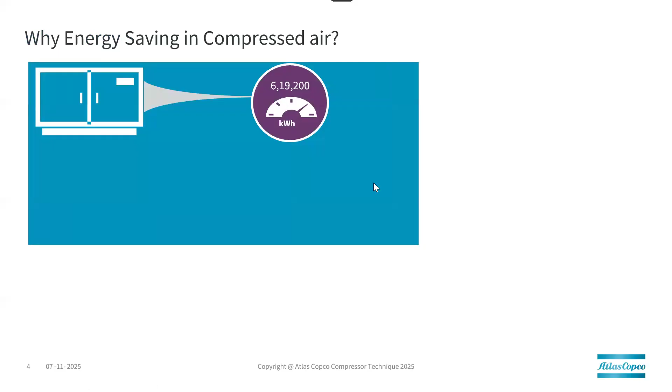This is all about Atlas Copco. Last year we almost completed 150 years in sustainable growth. To move ahead, why is energy saving important in compressed air? This is a simple brief explanation of why we need to save energy in compressed air.

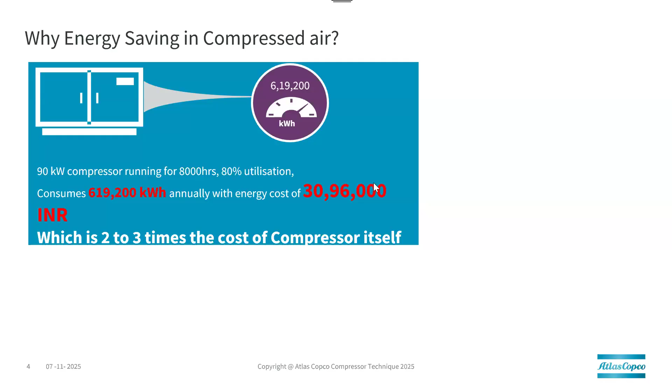If I would take a 90 kilowatt compressor running around 8,000 hours per year, with roughly 80% utilization, it would consume approximately 6,19,200 kWh annually. Considering a minimum of 5 rupees INR per unit, it would cost around 30 lakhs 96,000 approximately to run this 90 kilowatt compressor in your industry, which is approximately 2 to 3 times higher than the compressor cost itself. This is the compressor life cycle.

So it has been categorized into 3 types: maintenance, investment, and energy cost. Investment is the one-time investment, for example roughly 10 lakhs or 15 lakhs. Maintenance plays a pivotal role for compressors and consumes about 10% of the cost. Energy is the key for all compressors because we need current energy to run them, and it is actually 70% among the total 100%. So 70% of total cost of ownership is going to be in electrical consumption. That's why saving energy in compressor systems plays a pivotal role.

In upcoming slides, we'll show what opportunities are available to save that energy. In addition, air is free but compressed air is not, because we get air from the atmosphere, but once it has been compressed at the compressor outlet, it won't be free of cost. We are using energy to compress that air, so energy saving is mandatory in compressed air systems.

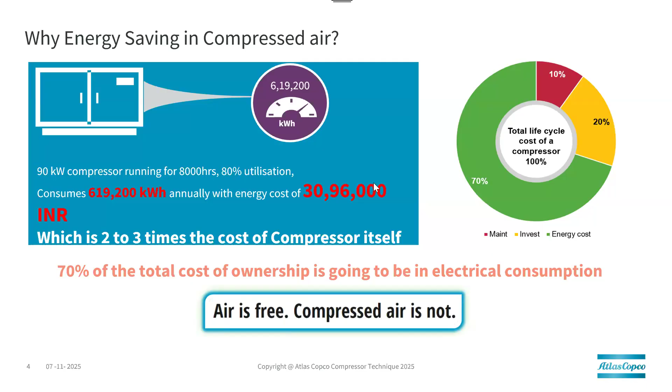What would be the operating cost, and why we have to pay serious attention to energy for compressors? Here's another rough example. In the supply side, if you take a 100 kilowatt compressor generating 600 CFM at 7 bar pressure, this compressor has air losses, demands, air leaks, and artificial demand.

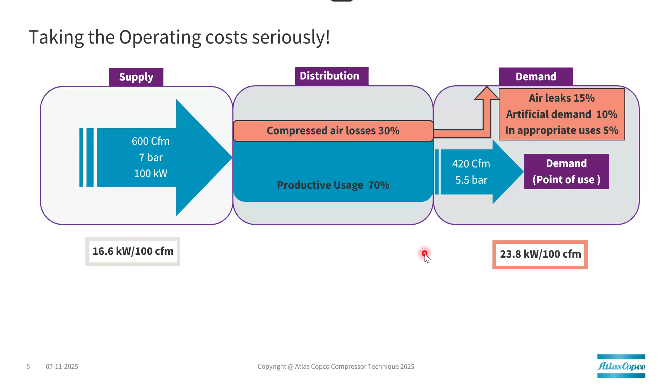Next, these are the portfolios we are offering to all customers in the supply side, distribution, and demand side - what activities can reduce energy in the compressor system. On the supply side, we offer compressor operating efficiency, dryer operating efficiency, compressed air quality, installation checks - yes, ultimately installation also plays a major role - primary receiver analysis, and compressor operation pattern. We have the activity-wise description in the upcoming slide, giving an overview of the portfolio we offer on the supply, distribution, and demand side.

On the distribution side, we offer pressure drop analysis, distribution pipe diameter calculation, because at many sites we are unable to provide the correct pipe sizes, and because of that we face loss of energy. And also leak detection.

So this will be the key role in the compressor part, and secondary receiver analysis. Yes, wherever we are facing a pressure drop issue at the demand side, this will play a key role. In addition to that, demand analysis, how much we are consuming, what would be the requirement, at least need to understand the pattern.

Followed by specific energy consumption in the distribution side, followed by demand side leak detection. Ultimately distribution and demand, both leak detection is mandatory, and application flow requirement for each division. And artificial demand, how to identify the artificial demand, end use optimization, POUs, compressed air quality, and emergency receiver analysis wherever the pressure drop is mandatory for certain applications.

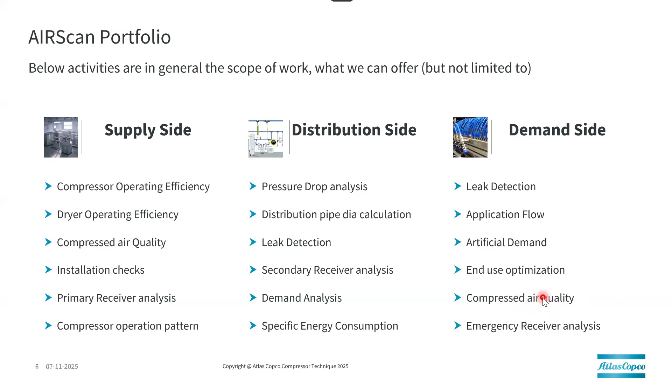So these are the brief overview of generation side. Here we have discussed about the compressor operating efficiency, dryer, compressed air quality. So these are the explanations. What are the opportunities available in front of us, in three categories: one would be generation side, another would be distribution side, and another would be demand side. If I consider generation side, these are the opportunities in front of us.

So it is nothing but upgrade. Everyone's familiar with screw compressors. Yes, we are familiar, but once the compressor starts deteriorating, the whole compressor will be utilized differently. The moment new compressors are brought into the field, their SPC won't be the same when it goes to 5 to 10 years. It won't be similar. Ultimately, deterioration will happen, so this is one opportunity that will exist.

So upgrade your old compressor with more advanced technology like VSD compressors. There we have opportunity to retrieve the SPC back to its original position. That can be possible up to 50%.

And another one is waste heat recovery. This will be the key part. Recover the waste heat from the compressor coolers for useful heating in your process, where we can save up to 90% of motor power input recovered from this process.

Followed by central controllers. If you have multiple installations, like 3 to 4 installations, and we don't know about the operation pattern, these central controllers will help us align our generation, and we could save energy by installing these central controllers. Central controllers won't only control 3 to 4 as the initial part, but can control up to 30 machines. This will be a huge number where we don't want to put much attention to the generation side, where this one master controller will take the initiative and control all the generation compressors.

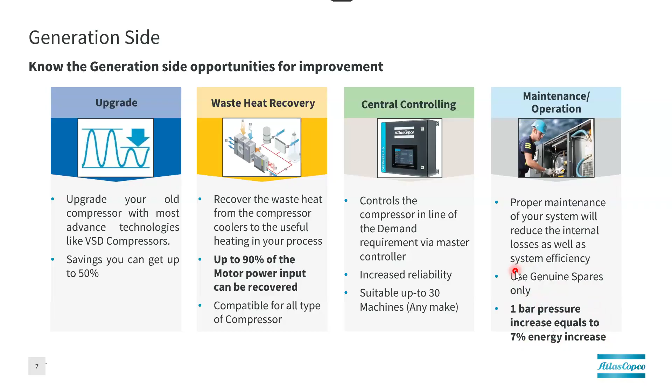And when it comes to distribution side, pipeline material, wherever air quality will be key, it's highly recommended to go for non-corrosive materials, because the pipes start deteriorating. At the compressor outlet, we used to get saturated air where it will be full of water. If you select the wrong material, it will start rusting and deteriorating.

The moment the pipe starts rusting, it will give a pressure drop. Ultimately it will end up increasing the compressor set point, which will again impact and increase energy consumption. And receiver sizing will be key. If your receiver is undersized, ultimately again pressure drop issues will be created.

Every 1 bar reduction in the operating pressure can reduce the energy bill, so this plays a key role. We need to identify unwanted bends to reduce the pressure drop. Just ask ourselves, if the demand side requires 6 bar, it won't make sense to keep the set point at 7 or 8 bar pressure. The compressor will be utilized - if it can generate 8 to 9 bar pressure, it will run. But rather, how much is the requirement, that's what matters. So we try to achieve reductions to achieve 7%.

In addition to that, 13% of compressed air is wasted due to leakages. So this will be key - wherever the 13% of leak can be arrested, it will give 1 bar pressure. And pipeline layout as well - there will be conflicts about whether compressor-dryer-receiver or compressor-receiver-dryer. These installations will also give some energy saving.

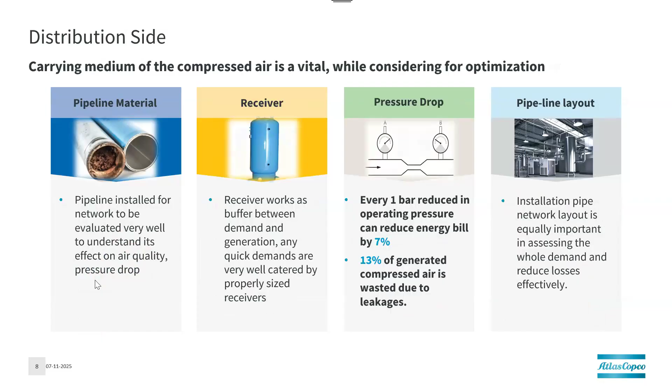And compressed air quality, at the last. This will be less priority, but will give high results, because whenever you are not paying attention to compressed air quality, as seen in the previous slide, the pipe material got deteriorated, ultimately ending up in a pressure drop. These are invisible things which impact energy saving, so compressed air quality needs high priority and attention. Water can damage pipes and pneumatics, and dust can also damage pneumatic pistons. Ultimately, all these things will impact energy savings.

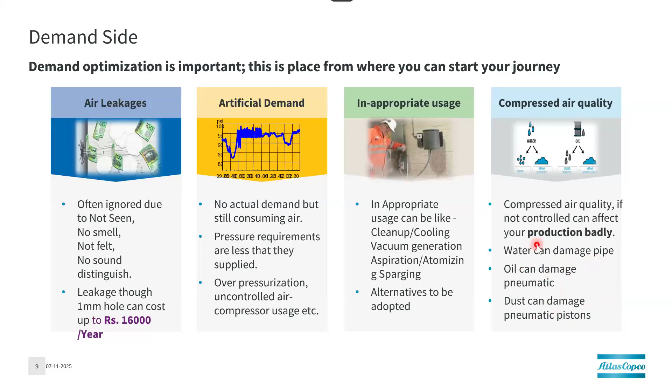So these are the success stories in large scale industries. We also conduct audits in small scale industries where customers are benefited - these are the installations. This will be one of our sites - a medium installation of 675 kilowatt compressors running, a 7-year-old plant. We conducted the audit execution for 2 days, including leak repair, pressure setting optimization, and demand optimization.

From this audit, the customer saved around 15 lakhs - 1,52,340 kWh per year.

If you consider the return on investment, ROI will be less than 15 days—actually less than a month when it comes to the energy part in compressors. Always, in all cases, ROI will be less than a month. As shown in the first slide, we witnessed that 70% of the energy is in compressed air. If you consider that investment in compressed air audit, it won't impact much, and ROI will be less than a month in all cases, maybe not more than 6 months.

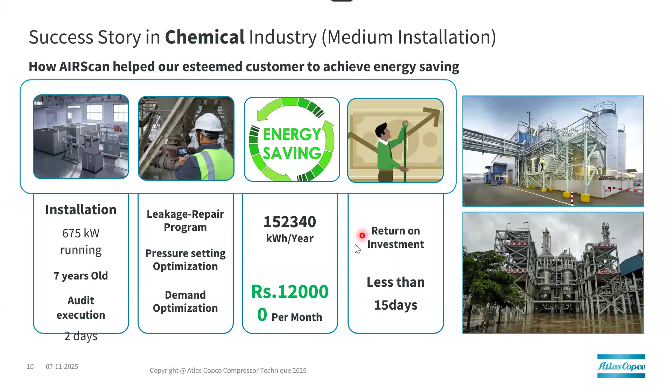These are small installations at one of our sites, small scale industries with 345 kilowatt compressors. We conducted the audit for 25 to 30 days, and for every activity we offered, the customer implemented it. As a result, the customer saved 8,56,000 kWh per year, and the investment payback was less than 2 months.

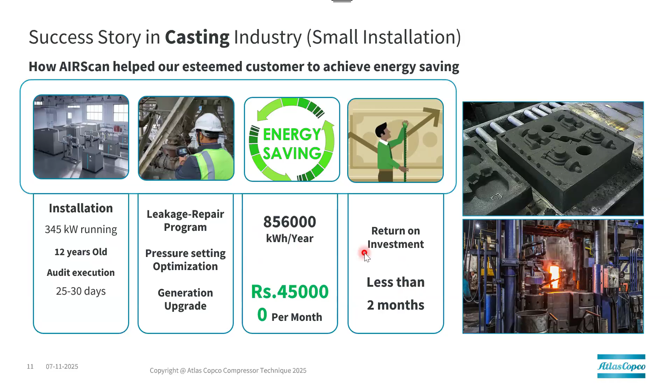So this is all about air audit energy saving opportunities on both the supply side and the demand and distribution side. Next, we move into energy saving solutions and technologies—what we are offering. I'll hand this over to Avinash.

Thank you, Vijay. Good morning everyone, and almost good afternoon. Thank you for this opportunity. I'm Avinash, as already introduced to you earlier.

In the energy saving solutions we'll explain to you, there are energy recovery solutions—mainly how we use the heat of compression or the heat of compressed air generated by the compressed air technology. There are smart air central controllers, where if you have many compressors and your pressure band is hard to manage, a smart central controller can help save energy. There's also compressed air piping—how a closed loop or ring-type system can help. And finally, why Atlas Copco is the best in the industry.

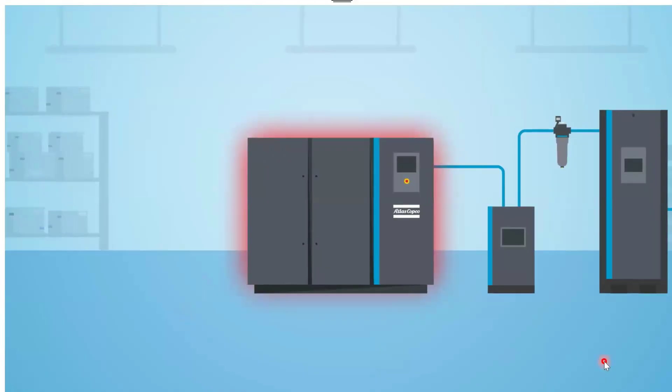Do you know how much waste heat is produced by your compressor? How much energy is blown into the environment? As energy prices and demand grow globally, it becomes more valuable. Up to 94% of the electricity input to a compressor is converted to waste heat. Instead of wasting it, we can convert it into a sustainable solution—that's where energy recovery comes in. Energy recovery uses the waste heat of your compressor for other useful operations, converting heat into heat again, using it to cool, or even to create more electricity. It's a versatile solution generating large savings. Our energy recovery solutions have already helped save 1.3 billion kilowatt hours, 809,000 tons of CO2, and 1.36 million trees. Atlas Copco's energy recovery solutions bring you one step closer to a low-carbon utility room, with increased efficiency, more savings, and a greener future for all of us.

Thank you. I think you can understand the basic of what energy recovery is. So moving on, next slide please.

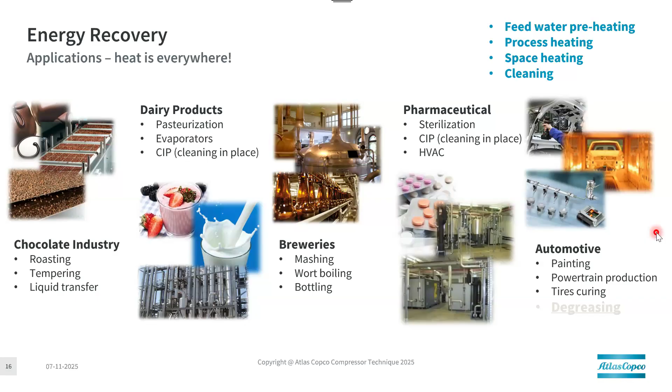Next slide please. These are certain case studies where we have installed our energy recovery solutions, and that gave huge savings to the customers, with ROI less than 2 years, or 1 year to be precise.

The first one is auto ancillary systems where the requirement of hot water is 60 to 70 degrees Celsius, used particularly for degreasing, where the heat source was previously electrical heaters, and the electricity used yearly was more than what they can generate from the compressors. So we provided energy recovery systems to their compressor system, and through that they got something like 60 to 90 degrees Celsius of temperature. With that water, they can use it for pre-treatment, washing, component cleaning, degreasing, and all the auto ancillary requirements which required low saturation water.

We also have spinning mills in the textile industry, with yarn conditioning plants (YCPs), which mainly require hot water above 60 degrees Celsius, but not needing to go above 150 degrees, which is high saturated steam. They require something like 50 to 130 degrees Celsius roughly. In that area too, because of old fashioned systems, they used electrical heaters, and we used their compressors, with the heat of compression generated from their compressors being utilized for energy recovery, giving huge savings as shown in the picture.

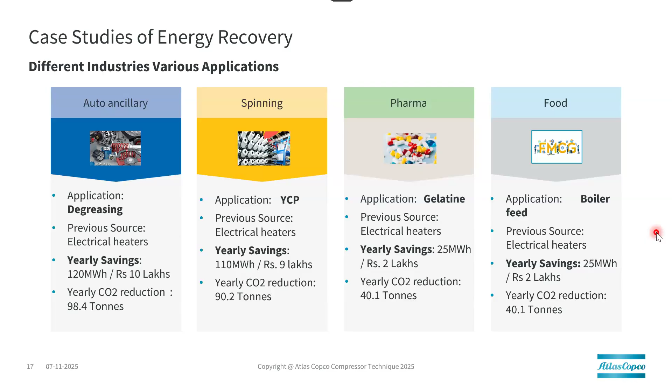The same applies for the food industries. These are the major requirements of how we utilize energy recovery systems, how we utilize the heat of compression, which is generated almost like 120 to 130 degrees Celsius, up to a maximum of 75% for oil injected compressors. We can convert that and utilize it for our requirements.

Moving on, we have central controller systems which we want to explain, with a brief small video that shows how our Concerto can do wonders with the complete music band.

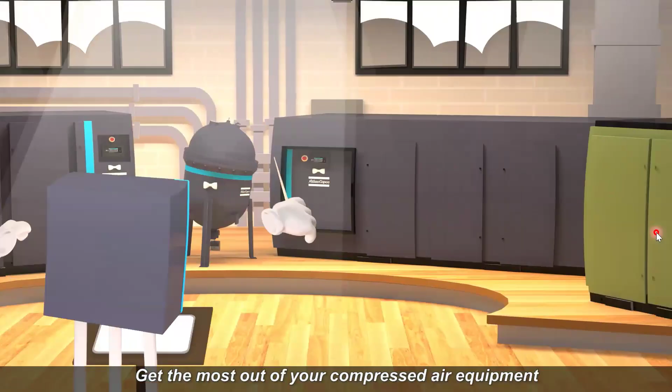Vijay, I think there was no audio was not there.

Sorry for the video not having an audio system, but what it is doing is, as a controller, it is trying to control all the machines. You can see on the control display there are three main things which are mainly being controlled by a central controller: power, running hours, and uptime.

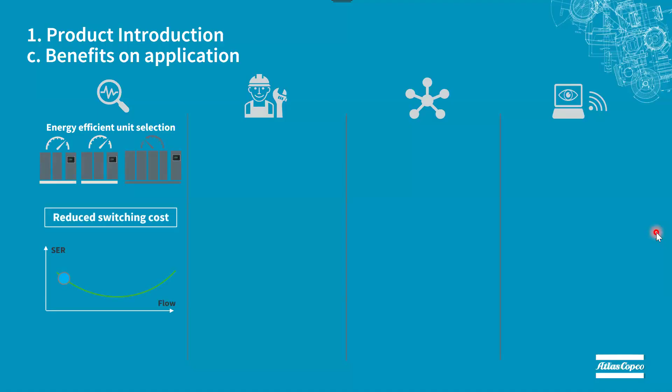For any compressor system or utility system, what an engineer or utility manager requires is to run a utility in a maximum optimal way, where as little power as possible is required for a maximum level of uptime, with running hours being even for all the compressors or all the utility systems.

Our central controller does the same thing. If you are not controlling it through any external systems, through a local operator or your internal team, there might be chances that the functioning might not synchronize with each other, because the compressors can't communicate with each other.

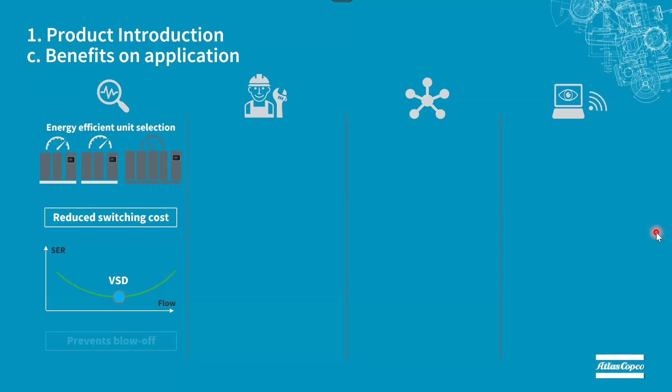Why is it important to maintain the same running hours? Because it maintains greater uptime. If you are running one compressor more than others, it can generate wear and tear for only that one compressor, causing a higher chance of breakdown for that particular compressor. That risk should be cancelled by evenly distributing the utilization of all the compressors.

Not only that, we can even stabilize the pressure, as Mr. Vijay already explained what a pressure band can do. Even a small increase of pressure, say 1 bar, can generate a 13% increase in your power requirement. So if we control it with a control system and synchronize it with our system...

What it does is, if your required pressure for example is 7.5 bar, it may delegate or maintain 6.5 or 7 bar pressure with the same flow being generated from the compressors. That's how our controllers function at an even, stable stage.

There's also a possible decrease in load-unload cycles if you have fixed speed compressors, where continuous requirement of compressors can also be decreased, and even your unload energy, which is wasted power, can also be decreased to a certain level.

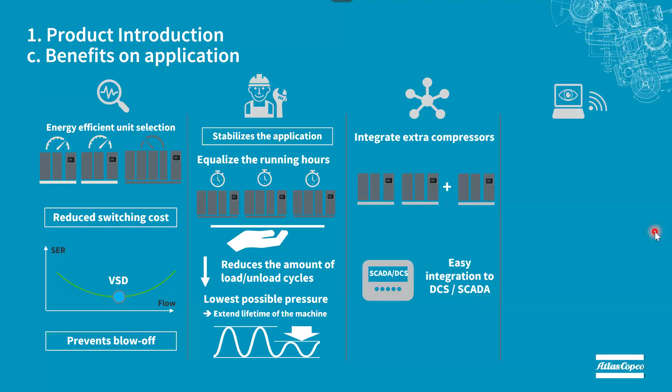Moving on, there are certain things which can help you monitor. Not only by controlling, you can also monitor with your distributed control systems, and that also through your SCADA systems. You can also integrate external compressors or competitor compressors, not only Atlas Copco.

There are certain technologies we are using, like remote view, where you can see from wherever you are in the world what the functioning of your utility is.

And smart view is how you analyze your data over 30 days - what analysis you want to do, how much runtime you are having, any downtime, any abnormalities or maintenance issues you can understand - that can be seen through the smart view systems.

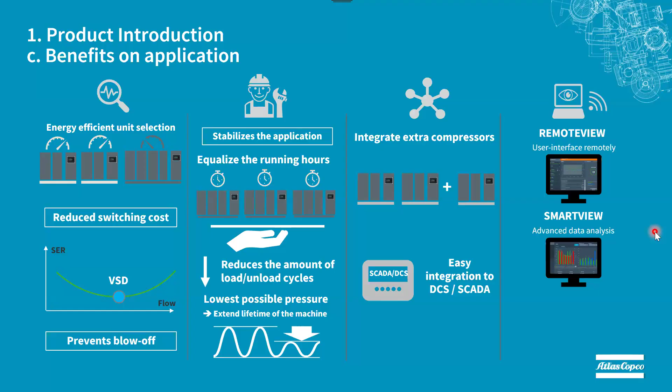And moving on, you have SmartLink also, which helps you understand wherever in the world you are, how the compressors are being run. I already mentioned how a competitor's machine can be interlinked to a controller.

We can have some CIM units, which are competitor interface modules, that can be fixed to the competitor machines and interlinked to our central controllers, so they can be controlled based on the pressure band and their control type as well.

So this is what our central controllers will provide. We have been installing this in major aluminum plants or major steel plants, and even in automobile industries, which are getting huge savings of almost 100 kilowatt hour per week of their running. That is humongous altogether, because unnecessarily that is going to waste due to the operations of the compressors.

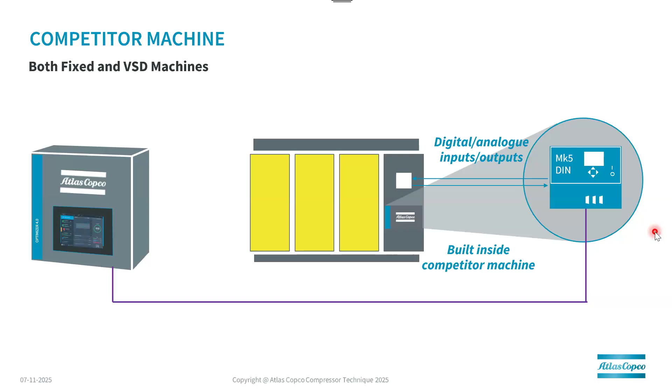We have AIRnet systems being installed in all the plants, in aluminum and stainless steel industries as well. These AIRnet systems provide a better and efficient way for air to flow.

Because if you use MS, the main problem with mild steel is it forms rust internally, and that creates friction. You might consider that friction can create a very low pressure drop. But if you are considering a whole plant, and the end point from the compressor room to the end point is something like 500 or 1000 meters, this pressure drop can generate a huge wastage for you.

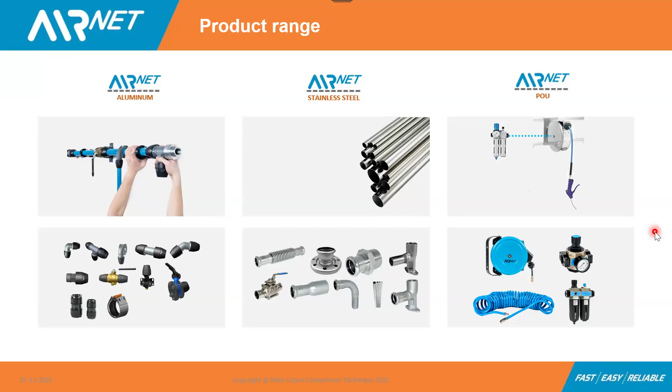As I already mentioned, these are all conventional piping system issues which we might not know till we understand why we are failing. That's why we have to move on to aluminum or stainless steel piping. The main reasons are that rust formation is not possible for stainless steel or aluminum piping, and internal contamination is not a case in AirNet systems, because there will be no internal oxidation or any formation in the pipe, and internal fittings accumulation will also not be possible.

Whereas in MS pipings we have seen a lot of plants where pressure is gradually reduced to more than 1.5 bar, which is a huge number altogether, because your compressor is running at something like 7 bar, and at the end point you are getting 4 bar, which is ridiculous. You are losing a lot of air.

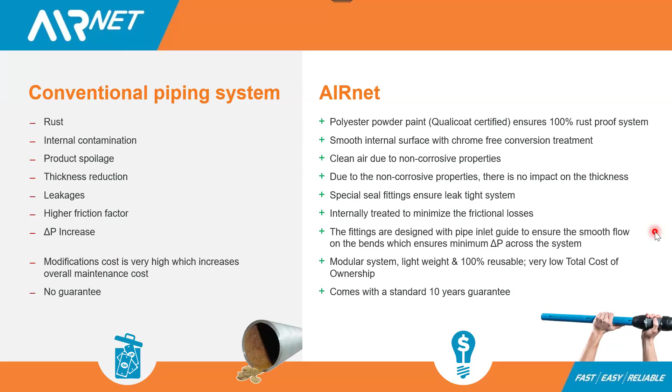I hope you can understand the importance of a piping system, and why we continuously explain that we have to maintain a closed loop system or a ring type header system. If you keep an open end for an application, that can provide airflow for your requirement, but at the extreme endpoint of your airline, that might not help you maintain that particular pressure, because the flow itself is decreasing towards the end point.

So gradually, as flow decreases, the pressure might also decrease. Whereas in a ring type system, the same header line is maintained throughout the system in a ring formation, which can reduce your pressure drop issues. Why is pressure drop decreased? Because you are utilizing the air uniformly. The air is distributed uniformly.

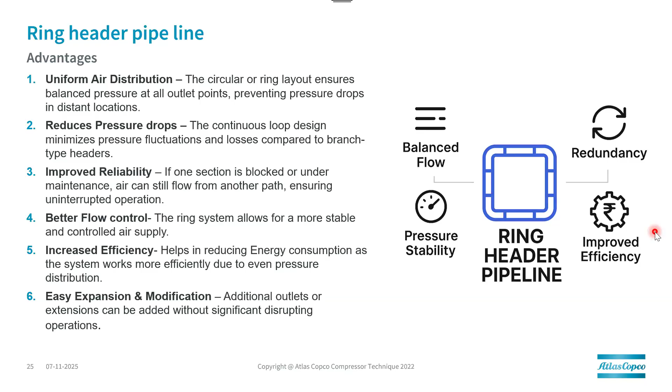Wherever the air is coming, you are just flowing it towards a ring formation, so that air pressure is maintained evenly all over the plant. You can understand the reliability concept here, because you won't feel higher pressure at the start of the compressor room and lower pressure at the end. A lot of requirements can be fulfilled by using the ring type system. I think this is self-explanatory of why we are using it.

For a transvector nozzle or volume amplifier, this is a case study which we have observed in a few pharma companies, and also in a steel plant which we recently audited. Initially we need to understand what a transvector nozzle is or what a volume amplifier is.

Generally it is a unit or equipment where we provide pressurized air to produce more flow with lesser pressure. How is that possible? You see a Coanda effect, which we have already explained here. A jet of fluid, in this case air, is subjected at a pressure of 6 bar, for example, flowing in one direction. Due to this Coanda effect, what it explains is that a jet of fluid will try to divert itself towards the curves of the path wherever provided.

If we provide any curve, the jet will try to flow towards that curve, which creates a lower pressure at the curved surface. That lower pressure will try to attract the ambient air, because there will be a small hole provided to suck the ambient air towards the compressed air line. Altogether, after the curved surface, this jet of fluid along with the ambient air is flown towards the outlet.

PPR piping, yes sir, we will get back to you for that.

This is what I am trying to explain. We even have a case study where volume amplifiers showed a lot of savings. This was a case where for a motor, towards non-driven and driven, they kept cooling points, and almost the loss was 30 CFM at 6 bar pressure. When we install a volume amplifier, it almost cuts the flow in half, and the pressure is also decreased to 1 to 2 bar. In that way we did the calculations, basic mathematics. So that's how we are doing things.

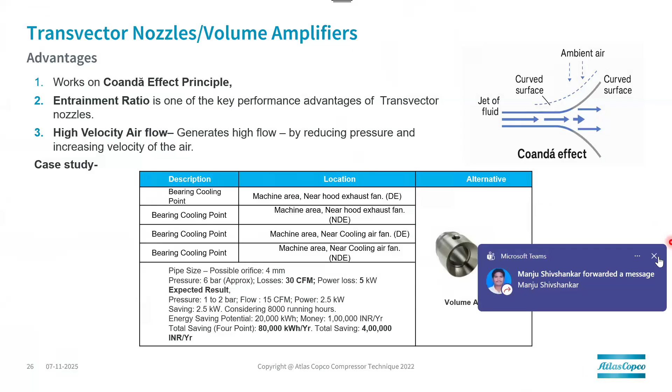So moving on, we would like to forward it to our Sudhakar sir, who can guide you towards it. And sir, for PPR piping, we will get back to you in the discussions in the chat question.

Yes, thank you Avinash. Thank you Vijay and Avinash for the wonderful presentation on energy savings aspect on Atlas Copco. I would like to take this presentation forward with our industrial solution. My name is Sudhakar, I'm handling Tamil Nadu area as a territory manager for equipment sales. So we'll go through the total solution we are offering in Atlas Copco. Avinash and Vijay mostly covered all the equipment like central controllers and energy recovery, so I can give the glimpse of how it will look in a compressor air circuit.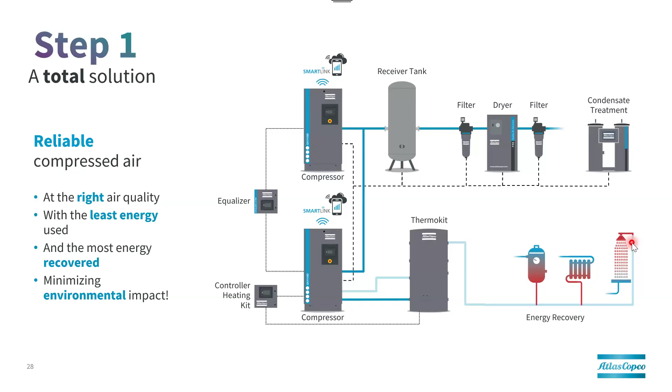And you can see energy recovery, this is very well covered by our colleagues. You can utilize the compressed air energy in your application, maybe if you require steam or whatever application where you need heat, you can separate it and use it, so we reuse the energy, meaning it provides energy savings. This is the total solution Atlas Copco is offering today. In our advanced compressors, we keep inventing a lot of things, and this is our latest innovations.

If you look at our high efficiency drivetrain, this is patented. Atlas Copco is offering direct drive in our VFD compressors. This direct drive will save a huge amount of energy, because there will not be any transmission loss in the compressor.

We are also offering an advanced filter system. I'm not able to bring all the filter systems here in the presentation, considering the limitation of time. We are offering filters up to 0.009 milligram per meter cube efficiency of filtration. So if you have any target of filtration with high efficiency, we will support.

We also have advanced controllers. Today in the compressor industry, we have all advanced controllers that make the compressor act very smartly wherever energy saving is possible. It will help the customer to save, and this is one of the advanced systems of Atlas Copco.

And we have a smart zero loss drain. So we are saving energy with our zero loss drain also, and this central controller has already been clearly explained.

And we have an inPASS filter. In industries, you can see a bypass valve arrangement near the filter. Whenever the filter changes, some service is required, and the air is bypassed with that bypass system. We brought this product called bypass inPASS filter, so if you install this filter, there's no need to go for a separate bypass arrangement system. You can change the cartridge and do service, and in parallel the bypass arrangement is available within the filter. The air can be routed through this bypass system without interrupting the supply of air.

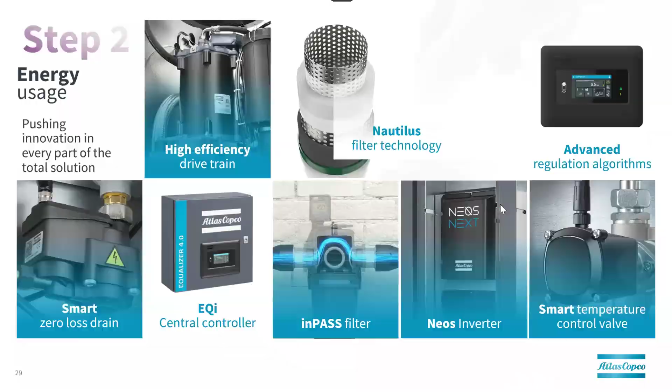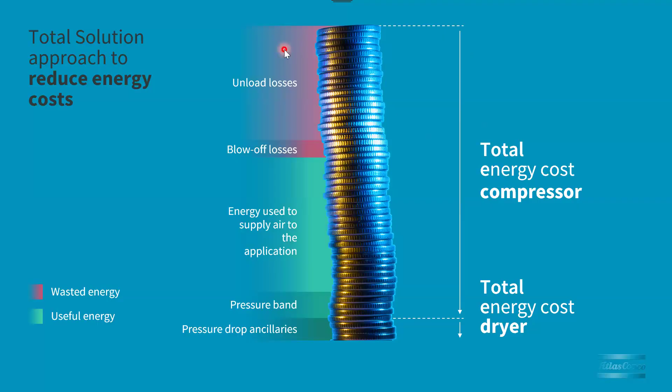If you look at these coins, this represents the total energy cost of the compressor where the industry is spending. This involves creating compressed air, for which energy is required, and we create pressure up to whatever the application demands. We are also paying cost for pressure drop, because ancillaries like filter and dryer also cause a pressure drop, and there will be blow off losses. If you look at today's fixed drive compressor, you might be aware of this term called blow off losses. This is the biggest headache for most industries - it's called unload losses, which is idle running loss. How we are addressing this and saving energy for the customer, we can see in the next slides.

Our VFD compressor, thanks to Atlas Copco's patented design, with our recent VSD Plus technology, ensures zero idle running, meaning we completely eliminate idle running. That is the unique feature of Atlas Copco. Compared to any competition, Atlas Copco's compressor will only switch on and off. If the load is reduced in the system, it automatically switches off. There is no limitation in the number of on-off cycles with this oil cooled permanent magnet and VFD setup, so the compressor will not go to idle running at all. This is the best thing about these VSD Plus compressors.

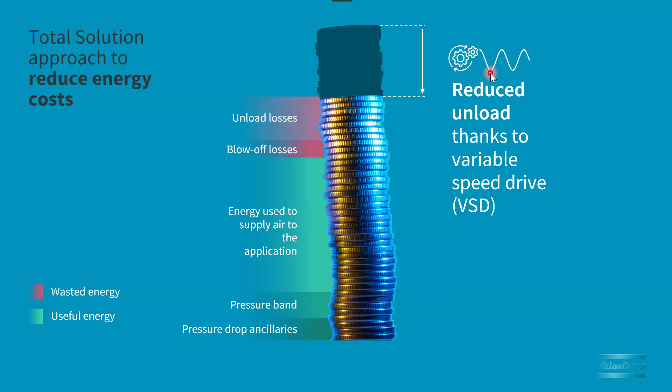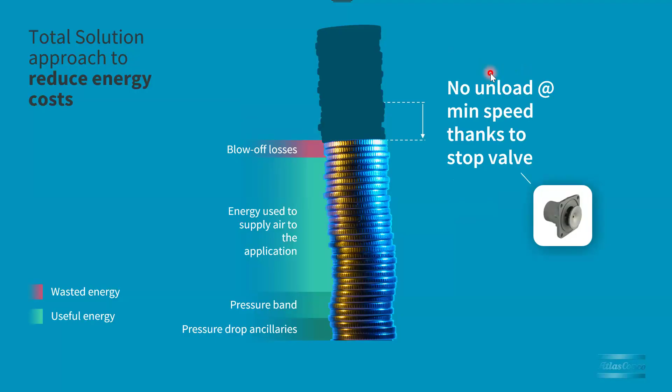By this, we are completely eliminating unload losses, and with no unload, blow off also will not be available in the system. Thanks to our stop valve, which allows air, once the load is less it immediately switches off and will not allow any air inside. So we ensure only on-off in the system, completely removing blow off loss also.

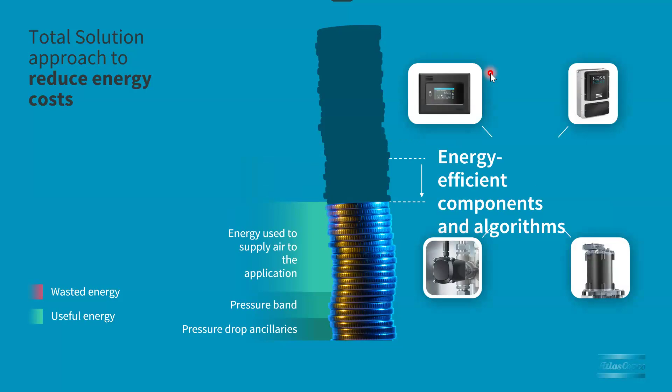As I explained, our central controllers and other systems save power. With this combination of systems, we save further energy according to the application, adjusting to the application. The equalizer narrows the pressure band and will not allow the compressor to cascade through different pressure settings. It gives a lot of energy savings to customers.

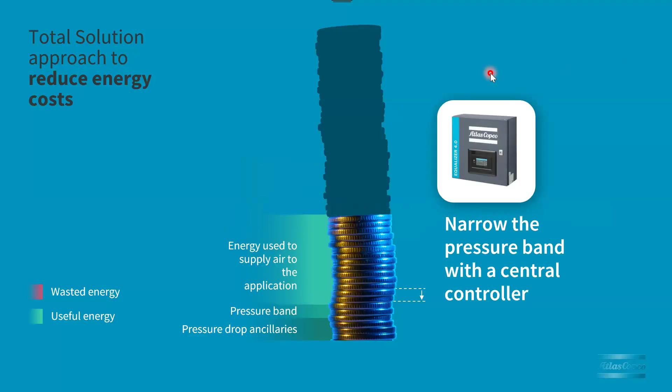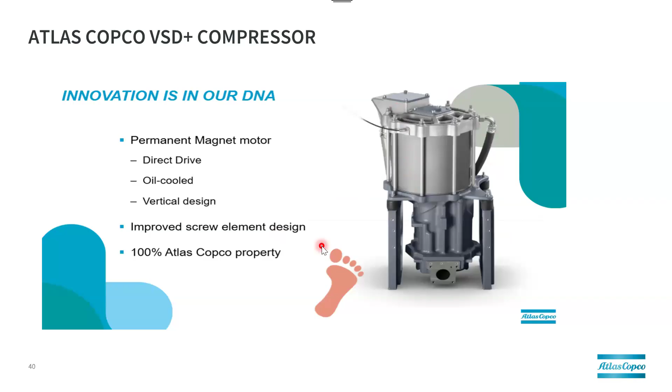So this is one of the unique features we are offering, and this is a vertical design. The vertical design allows us to reduce the footprint of the compressor. Most compressors in the market today are horizontally mounted - motor, drivetrain, as well as the screw element. If you look at our advanced VSD Plus compressor, you can see a vertical mounted drive system as well as the screw element, which saves a lot of space. And with this patented improved element design, now we are offering high flow while consuming less power to produce that air.

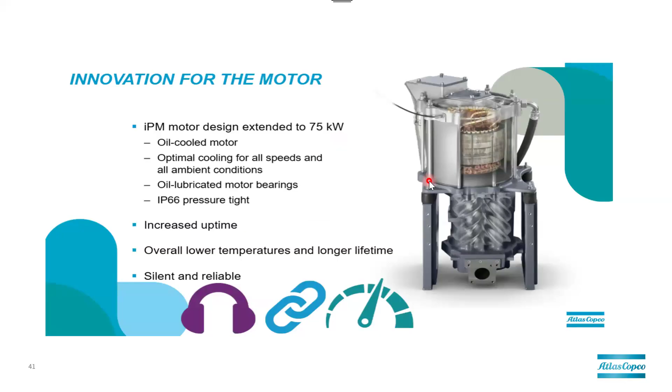This IPM motor is available in all sizes. Here it's mistakenly mentioned as 75 kilowatt - now we are offering all these sizes, starting from 7 kilowatt. This motor is oil lubricated, and this system has IP66 protection class available. So you will have increased uptime, and it will run at optimum temperature for a longer lifetime. That is what all our global customers believe about Atlas Copco reliability, and we have so many systems in their factories. This is also a very silent compressor compared to other old classic compressors.

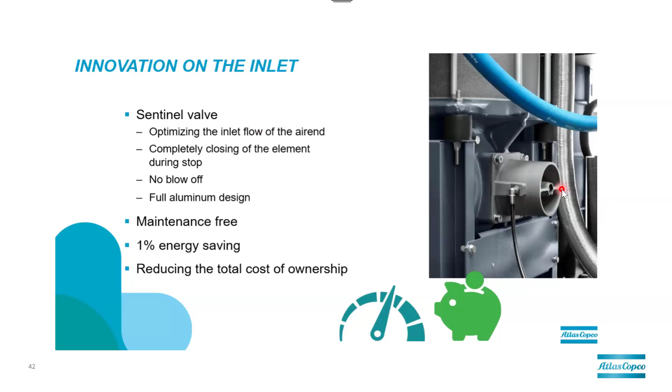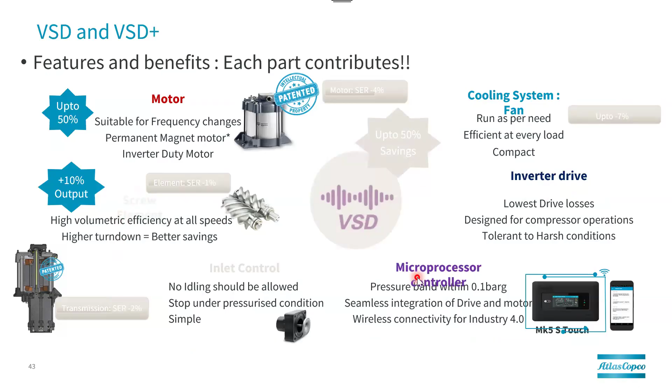And as I already covered, there is a sentinel valve. Thanks to the sentinel valve, which removes unloading completely, it allows the compressor to run in on-off mode, and this is maintenance free. These are all the features we are offering with our VSD Plus compressors currently. With this permanent magnet motor, compared to old fixed drive technology, we are saving up to 50% energy. Thanks to all the parts we've covered - this screw element and these controllers - everything ensures the highest energy saving to our customers.